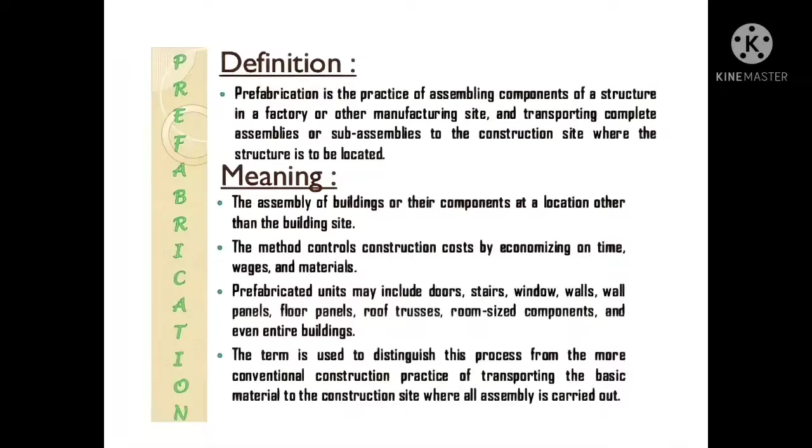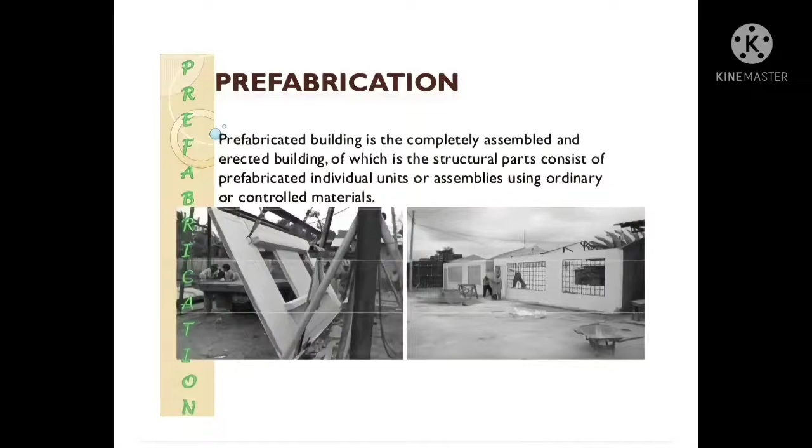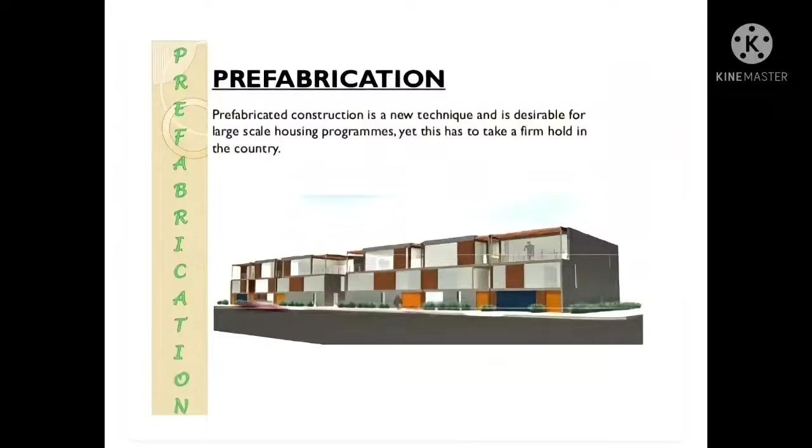The term is used to distinguish the process from the more conventional construction practice of transporting the basic materials to the construction site where all assembly is carried out. Prefabricated building is a completely assembled and erected building of which the structural parts consist of prefabricated individual units or assemblies using ordinary or controlled materials. Prefabricated construction is a new technique and is desirable for large scale housing programs, yet this has to take a firm hold in this country.

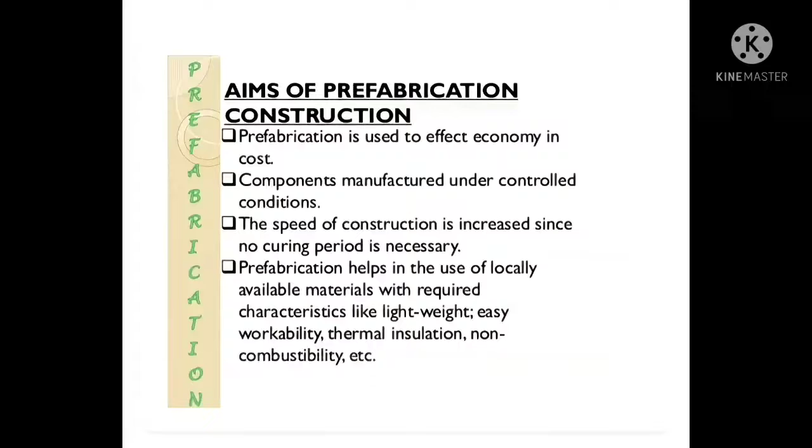Next is the aims of prefabrication constructions. Prefabrication is used to effect economy in cost, with components manufactured under controlled conditions. The speed of construction is increased since no curing period is necessary. Prefabrication helps in the use of locally available materials with required characteristics like lightweight, easy workability, thermal insulation, non-combustibility, etc.

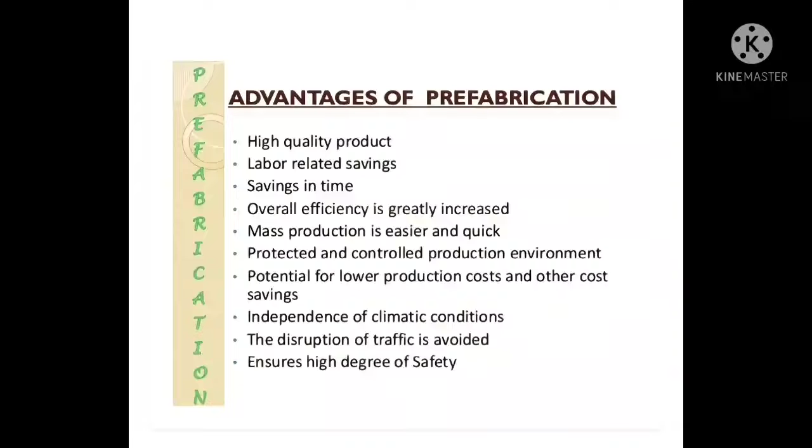Moving partial assemblies from a factory often costs less than moving pre-production resources to each site. Deploying resources on site can add costs. Prefabricating assemblies can save costs by reducing on-site work. The consistent indoor environment of factories eliminates most impact of weather on production. Cranes and reusable factory supports can allow shapes and sequences without expensive on-site falsework. Machine mediated parts movement and freedom from wind and rain can improve construction safety.

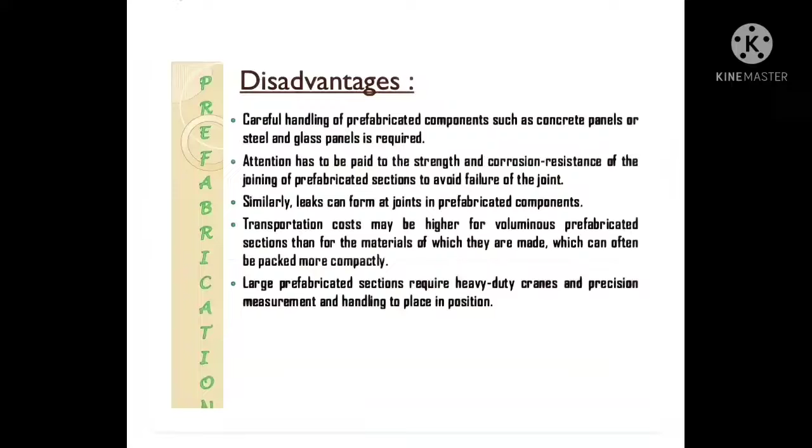Disadvantages: careful handling of prefabricated components such as concrete panels or steel and glass panels is required. Attention has to be paid to the strength and corrosion resistance of the joining of prefabricated sections to avoid failure of the joint. Similarly, leaks can form at joints in prefabricated components. Transportation costs may be higher for voluminous prefabricated sections than for the materials of which they are made, which can often be packed more compactly. Large prefabricated sections require heavy duty cranes and precision measurement and handling to place in position.

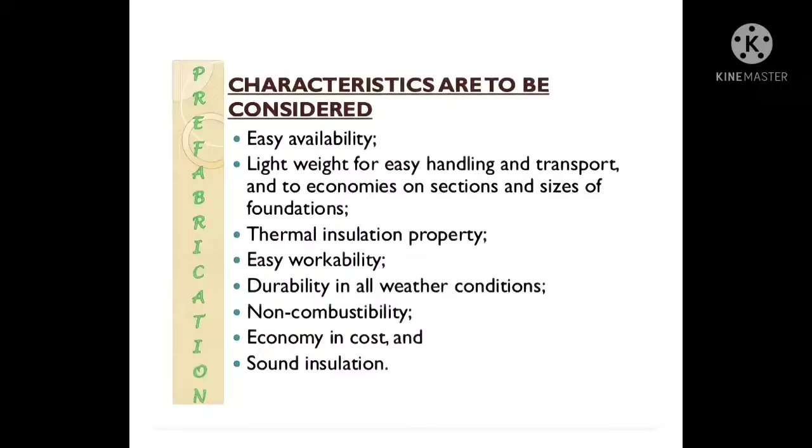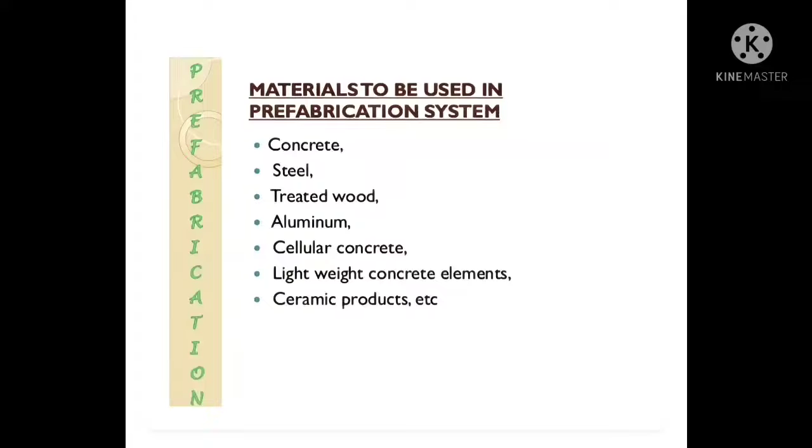Characteristics to be considered: easy availability, lightweight for easy handling and transport and to economize on section and size of foundations, thermal insulation property, easy workability, durability in all weather conditions, non-combustibility, economy in cost, and sound insulation. Materials to be used in prefabricated systems: concrete, steel, treated wood, aluminum, cellular concrete, lightweight concrete elements, ceramic products, etc.

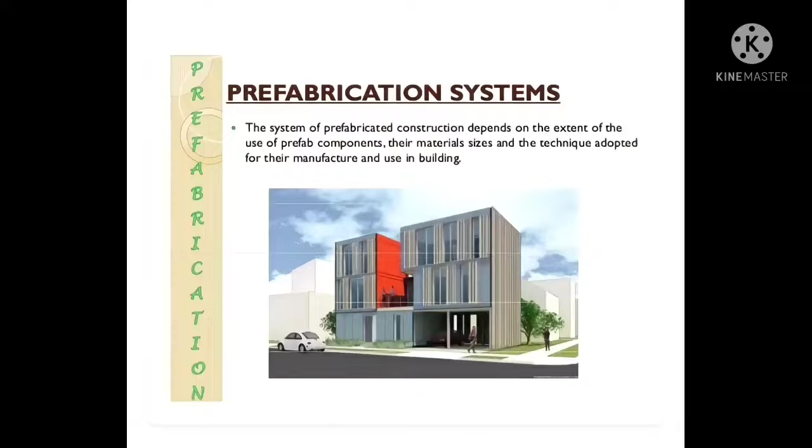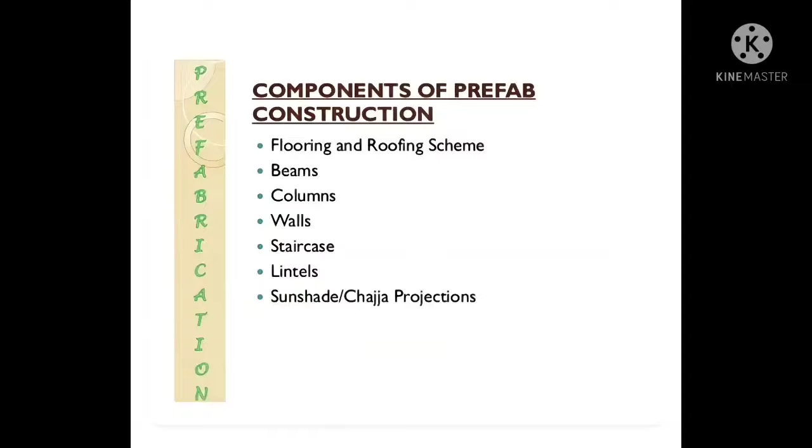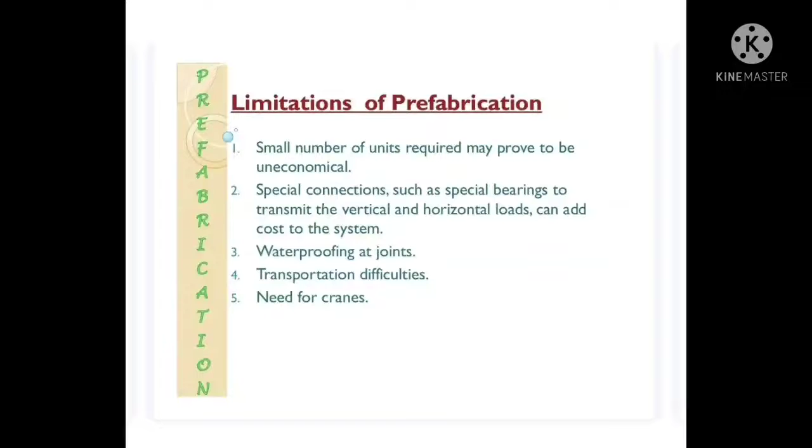Prefabrication system. The system of prefabricated construction depends on the extent of the use of prefab components, their material sizes, and the technique adopted for the manufacture and the use in building. Components of prefab construction: flooring and roofing scheme, beams, columns, walls, staircase, lintels, sunshade, etc. Limitations of prefabrication: a small number of units required may not prove to be economical. Special connections such as special bearings to transmit the vertical and horizontal loads can add cost to the system. Waterproofing at joints, transportation difficulties, need for cranes.

Prefabrication as defined will be done in two stages: manufacturing in factory conditions and erection of components at the required location. These require certain stages of preparation. They are casting, curing, transportation, and erection. Casting. Precast components are cast with controlled cement concrete in molds of required shape and sizes. The vibrator is used to vibrate concrete and this removes any honeycombing inside the component.

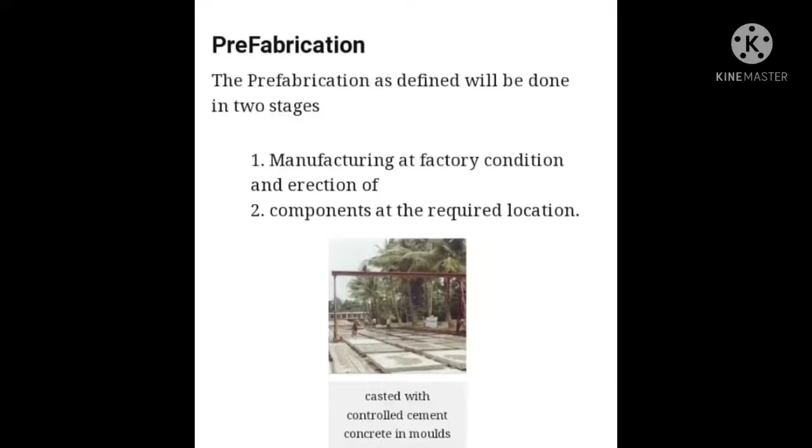Curing. After 24 hours of casting, the cast components are released from the mold and transported to curing tanks. Certain special components like railway sleepers where high strength is required are steam cured. Transportation and erection. After complete curing is done, the components are transported to the site with heavy trucks and erection will be done using cranes with a skilled labor force.

Conclusion. The use of prefabrication is estimated to have almost doubled in the last 15 years, increased by 86%. The use of precast concrete construction can significantly reduce the amount of construction waste generated on construction sites, reduce adverse environmental impact on sites, enhance the quality control of concreting work, reduce the amount of site labor, and increase worker safety. Other impediments to prefabrication and preassembly are increased transportation difficulties, greater inflammability, and more advanced procurement requirements. I hope you have understood.